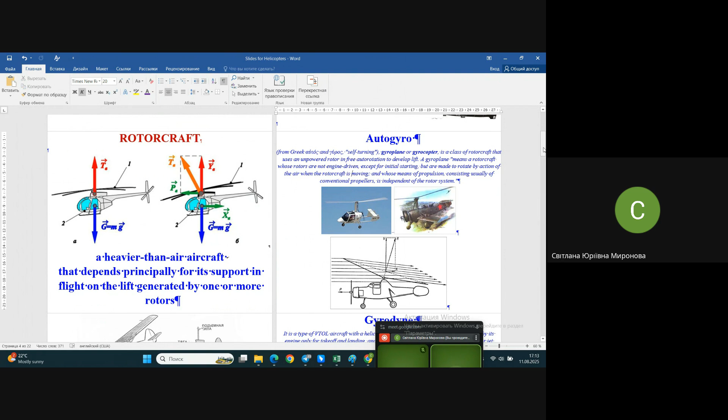Let's start from the beginning, and from time to time I will use different places to illustrate my words. I hope I'll be short, I hope I won't overtime this time. What I propose you see first...

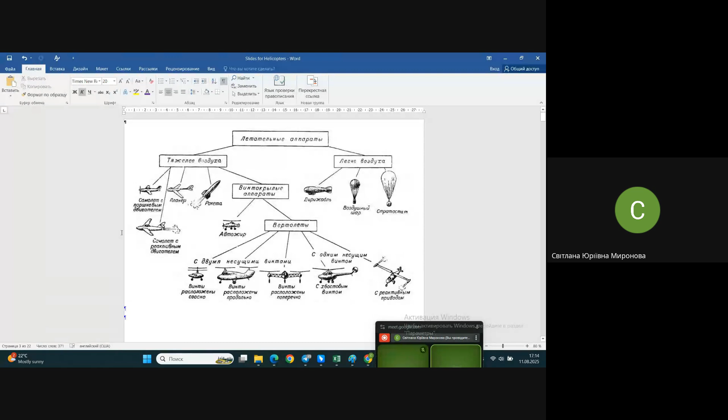The very first slide is about classification of flying machines, flying vehicles, which you have already seen in previous slides - the whole variety of different airplanes, heavier than air, lighter than air, with single wing, driven, non-driven, with rotors, and so on. Here is the great area, the whole area of rotorcraft. Taking a look, it's a variety of structures and schemes, even greater than the variety of heavier-than-air and lighter-than-air fixed wing aircraft, rockets, and so on.

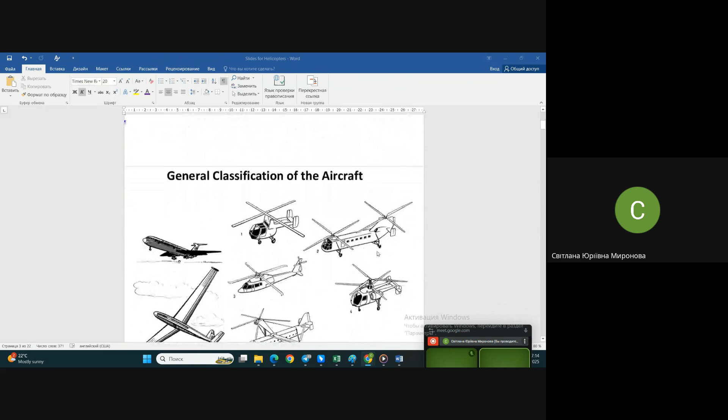In this picture you see aircraft of aerodynamic type only - previously there was rocket dynamic, aerostatical, and aerodynamical represented. Here you see aircraft only of the aerodynamical type. What do we see? Airplane, fixed wing aircraft with some propulsion system. Glider, again fixed wing aircraft, but without a propulsion system. That one that looks like a flying saucer, I already explained, is the so-called ekranoplane.

In English it's also called ekranoplane - a direct translation from our language, but they got used to this name taken from Slavonic languages literally. This ekranoplane, directly 'screen plane,' is a type of flying vehicle rather similar to an airplane with fuselage and wing, a so-called blended body, practically integrated one into another. Such a screen effect, flying over a screen literally, gives it an additional lifting effect due to its shape.

It creates something like a wind tunnel between the ground and the bottom surface of the aircraft. But it's able to lift its heaviest load only under the condition that it's flying over a conditionally flat surface - maybe a desert area, maybe a sea, or maybe a polar area with heavy snow and ice. In case of normal flight, it's quite the same flying machine, but not even with much higher aerodynamical quality, I mean.

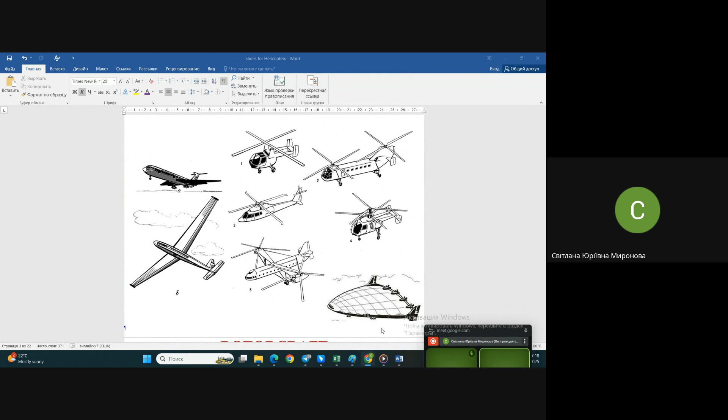Let's take a glance at the definition. What is understood as rotorcraft? I forgot to say, a heavier than air aircraft - that is important - a heavier than air aircraft that depends principally for its support in flight on the lift generated by one or more rotors, as I said. But depending on whether these rotors are driven by an engine or not, and depending on whether the horizontal flight of this aircraft depends only on the rotors or not, there are some principally different schemes of them.

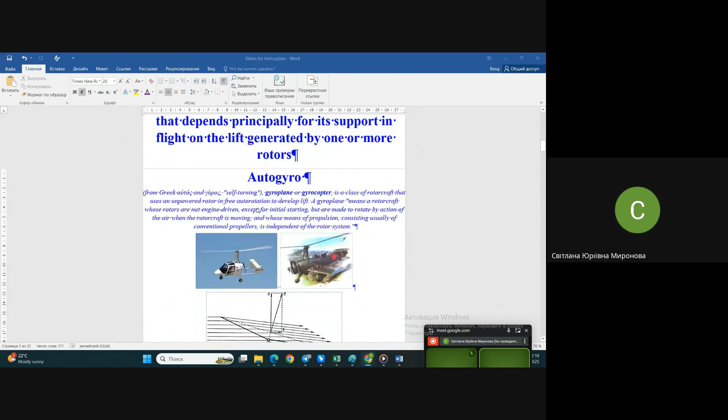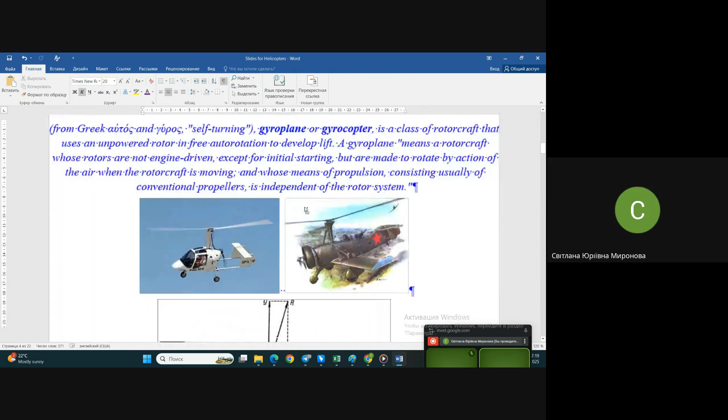I will start with the one that I have mentioned once already, and this one is called autogyro. Maybe it's necessary to show those names with another color. Let it be. Now you see in front of you pictures of an autogyro, so you understand that this is not the latest achievement or someone's trick - maybe you're already familiar with those. Forgive me, I forgot to switch off those slides.

On the left, a typical airplane or general aviation aircraft, but this typical airplane, for some reason, has a rather big rotor at the top. If you watch attentively, you may notice there is a rotating prop of pushing scheme behind the fuselage. That one is the autogyro of the period of the Second World War. As you may understand by the general appearance and by this sign, it's a Soviet flying vehicle.

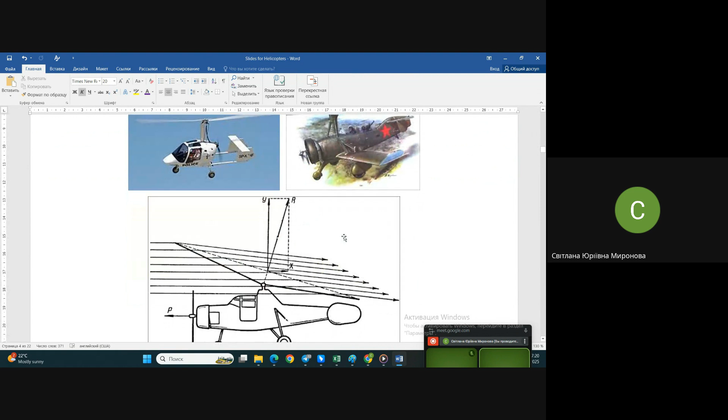And the same - you see a normal airplane, but this normal airplane, for some reason, has an additionally huge prop. What is the idea of this flying machine? Actually, it's something like an airplane, but with insufficient wings practically, maybe almost without wings. Look at this - seems like this creature has no wings at all.

What holds it in the air? It needs a normal runway - it can't take off vertically and land vertically. Well, it's already practically possible, maybe not quite vertically, but possible. Its rotor is not connected to the engine. The rotor works in auto-rotation mode, meaning it will start rotating after this flying vehicle, this dragonfly, runs over the runway for some meters at least, or maybe some tens of meters.

The relative wind, which appears due to the motion of this vehicle on the runway, will start to rotate the rotor, which is not fixed, and this auto-rotation will result in additional forces - the so-called resulting force. This resulting aerodynamical force, which appears on the airfoil, depending on how this rotor is deviated, may be decomposed into a horizontal component, which will counteract the thrust - I mean, this machine has more significant drag, due to the rotor.

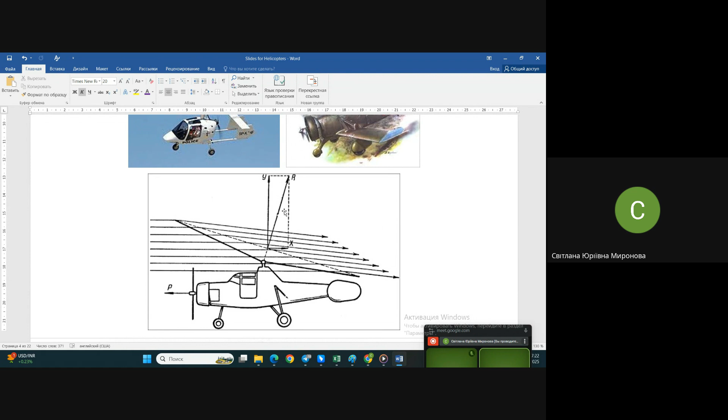On one hand, it has additional lift, or it may have lift only due to such an auto-rotated rotor. But look at this - that one, practically without wings, means its lift depends completely on the auto-rotated rotor, while that one has a wing. So in flight, it somehow relies on the lift of the wing, and the auto-rotated rotor gives additional lift together with additional drag. And what is better with respect to a normal helicopter? Well, on one hand, this creature is not able to hover, in contrast to a helicopter - it can't stop in the air and hang somewhere over the surface, which is called hovering.

And that one is not able to continue, as it stops its linear motion. In some seconds, some minutes, this autorotation stops, quite clear. And in contrast to helicopter, I said it needs horizontal flight on one hand, and on the other hand,

in contrast to airplane, it has something additional. No, it's not an air brake, but it's like a brake which reduces the falling down of this airplane in case you have a problem with the main engine, for instance. So in terms of takeoff, they are a bit more safe than a simple helicopter or simple airplane, maybe.

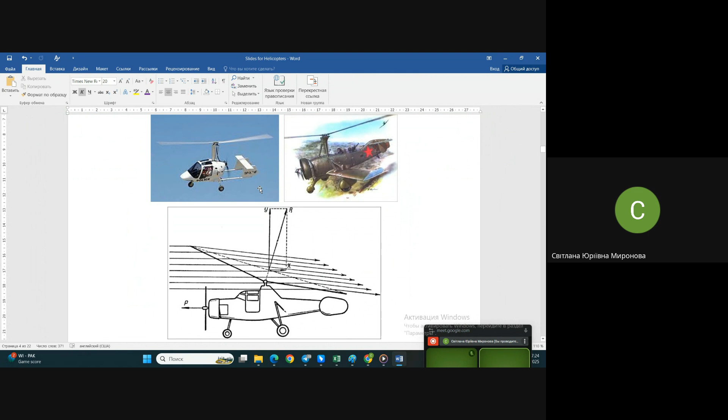But they are not able to take off vertically, and they are not able to hover in air. What you see, gyroplane definition: rotorcraft that use an unpowered rotor to develop lift. They vary extremely in design. You might check it on the internet, or maybe we will see it together if time is enough to see some photos.

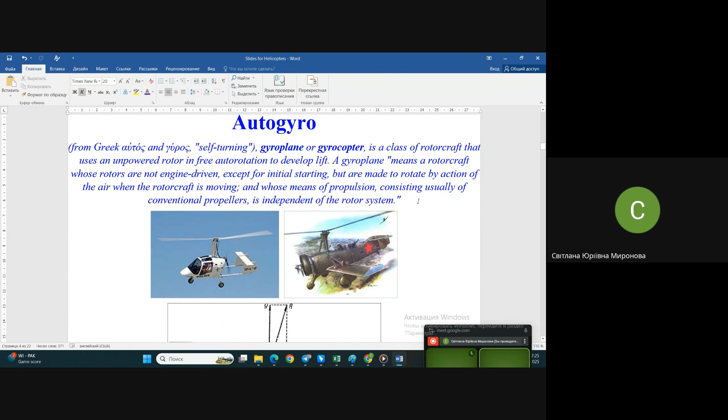I placed here a couple of them to demonstrate the variance. These autogyros were created historically. They appeared earlier than helicopters, earlier than the first models of helicopters at all, approximately 10 to 12 years into the 20th century, when the first models of autogyro were already designed. Whether they were flying or not is difficult to say, because people write there are no evidences of their flights, but at least models were created and people already thought about this way of flying.

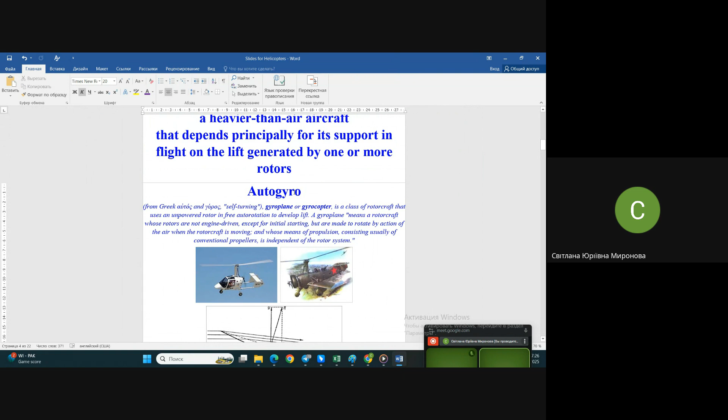The most popular is autogyro, but gyroplane, gyrocopter, they are also usable. You do remember what is my opinion about terminology in English-talking countries. And now you see that autogyro - I hope it's obvious for you - is something like a hybrid between a conventional airplane and conventional helicopter. So it combines both advantages and disadvantages of both types.

These typically look like dragonflies, not really flying bicycles, but with skin over the skeleton. These vehicles are of piston engine type, or maybe electrical piston type, electrical type of engine. I have seen photos, if I'm not mistaken, even on the manual - not ready to show you right now, maybe in a previous set of slides - photos where it was really something like a bicycle, human-powered flight for such devices.

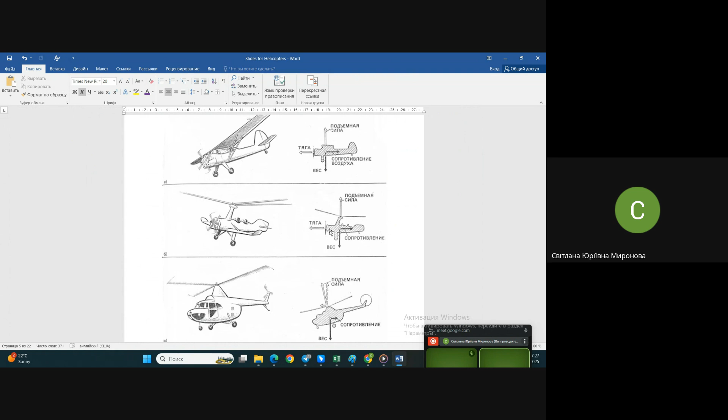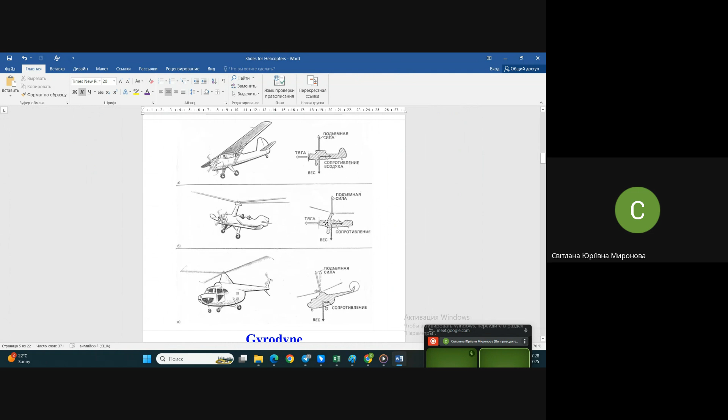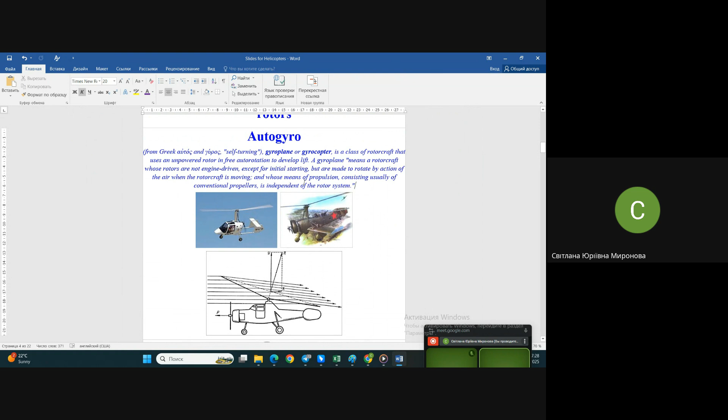Autogyro, gyroplane, gyrocopter: slow in speed, usually light, not heavier, but there are some of them, as you might see even in photos, that are rather sufficient in weight. Well, next type of flying machine - that one, once again, has a rotor, but this rotor is not connected to the engine, and it works in the autorotation mode.

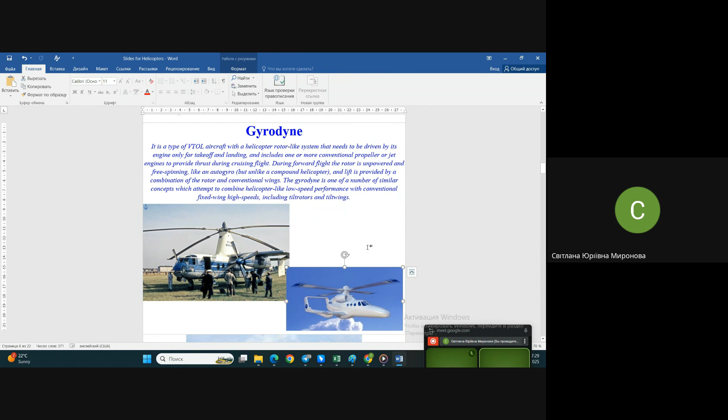We have already seen some of their airplanes in one of our classes, and I hope in the next class we'll also see and talk about their models and about the designer - once again, Burt Rutan, who is responsible for this. Time to time, mostly he is responsible. Look now, what do you see in the picture?

At first glance, first look, you see an airplane. But this airplane, for some reason, has additional devices. At the top, you see an American Gyrodyne. And at the bottom, you see a Soviet Gyrodyne. Gyrodynes, the idea of Gyrodynes, were extremely popular in the years 50, 60, 70 of the previous century.

Actually, the idea was to use them mostly for cargo or passengers, and they practically look like normal airplanes, but they also have a main rotor, at least one main rotor. They have normal engines responsible for cruise flight, but they also have a main rotor. You may compare it with a convertiplane, for instance - you may say it's a convertiplane.

No, it's not, because it has a main rotor that works permanently, in contrary to the convertiplane, which changes the directions of its props in order to serve either as main rotors or as normal props in flight. That one permanently uses two different systems of propulsion, let's say, and of creating lift. What is no less important...

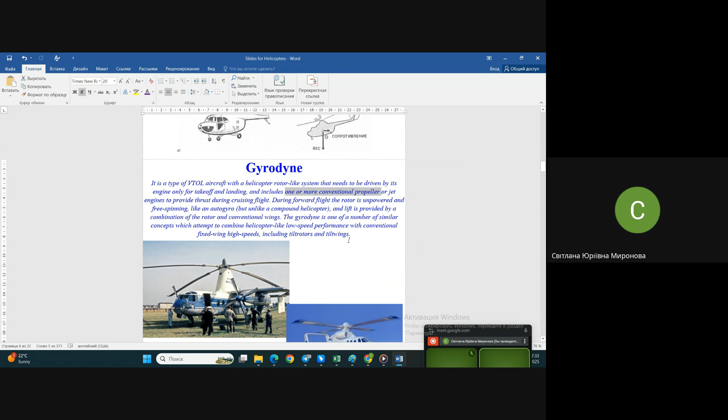What are obviously normal engine props, prop engines with props. And here is also visible - look at this, in the cabin of the gyrodyne we see normal props and the exhaust channels and so on. So it looks like a hybrid of helicopter and airplane, but autogyros are usually little, light dragonflies. These ones are rather heavy. They are useful for their ability to take off and land and hover in the air.

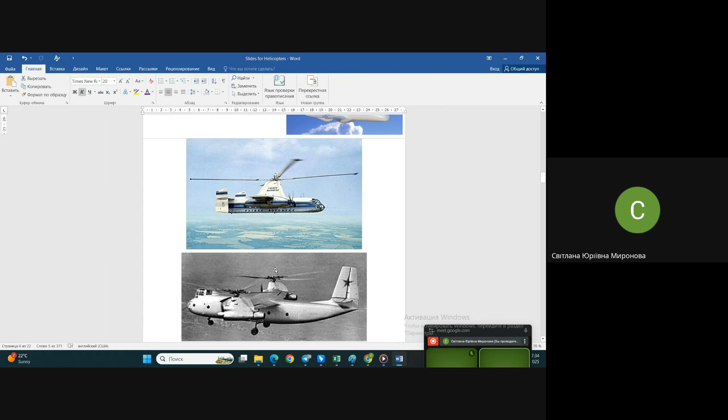Whether they are reliable and whether it's feasible to transport people like this, I have my own opinion about, and I propose you to form your own opinion about the feasibility of such a flying machine.

Well, helicopters. Now helicopters. A helicopter is a clean, normal rotorcraft in terms that the helicopter's lift completely depends on the motion of the helicopter rotor. And I would say that is the main disadvantage of any helicopter.

As soon as the engine stops, it may block - in some cases auto rotation of the main rotor is available, in other cases it just blocks this rotation. And instead of a flying machine, it becomes a falling stone, falling down. You understand? So, in my opinion, helicopters are mostly the most dangerous flying machines, in my opinion. Extremely useful, various in their functions, as funny as nothing else, as for me, in their appearance. Lovely, lovely, lovely. But in my opinion, it's a very dangerous machine, and wherever it's possible, I exclude the use of this machine.

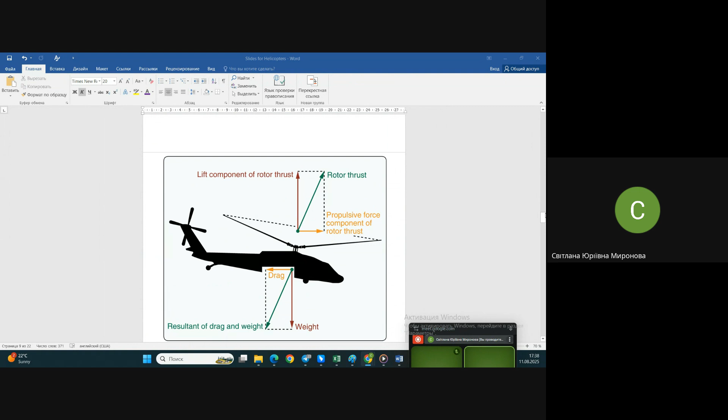Now we already see it. Let's come back to the previous picture. That one. This force is directed normal to the main rotor, and it may move the helicopter up, or in case it's less than the weight of the helicopter, it may descend and move down. But how to move the helicopter to the front, to the left, to the right? Usually this problem is solved in such a way.

The helicopter declines its nose, pitching down a bit, and you see here the plane of the main rotor also pitches down, and the resulting force, the force of the rotor, is deviated with some angle. Due to this, there appears on one hand lift, a decomposition of this force as we have seen many times already: the lift and the thrust that pushes the helicopter forward.

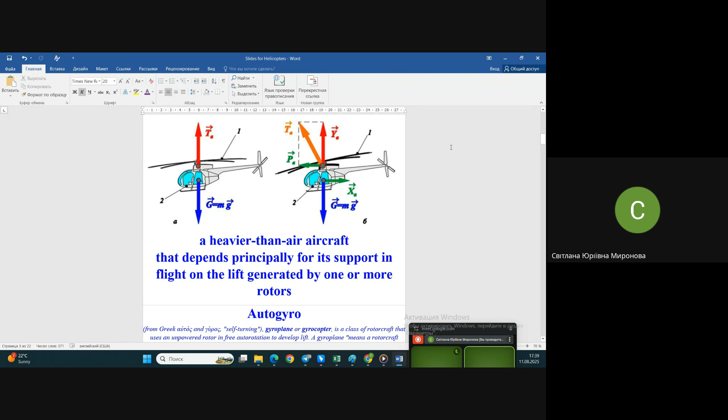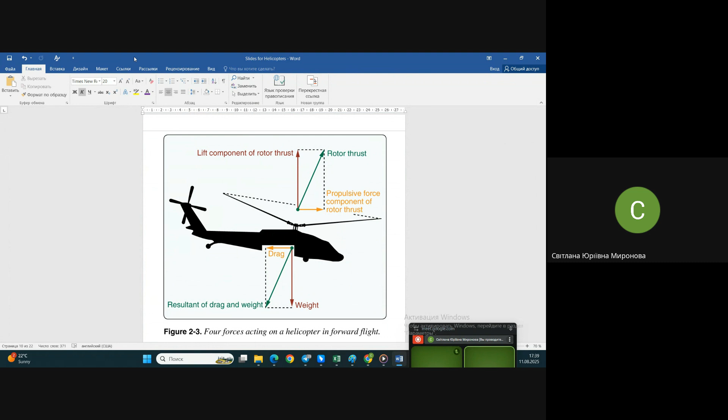Seems like everything is very simple, but it's a big 'but.' Take a look at this. No, here is the same thing but with more explanation. I took this from the book I've shown you, from the Federal Aviation Administration, this picture. I show it on purpose with the figure number. If you need it, you will find it and read about it.

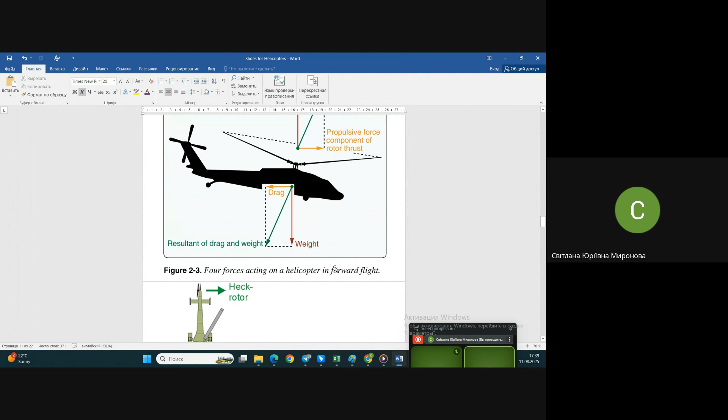Here I placed a couple of beautiful pictures to show you why a helicopter needs some additional rotors.

Let's recollect Newton's third law: action is equal to reaction. What does the helicopter do? It rotates the rotor. And due to these blade rotations in one direction, there appears a reacting force which rotates the helicopter. The whole helicopter will be rotated in the other direction.

I think you have already seen such a video maybe. I may try to find it right now, but I think it's not necessary. When there's some problem with either the tail rotor of the helicopter or some other controlling device of the helicopter, we see how the helicopter rotates in the air instead of just hovering, it starts to rotate severely, and this loss of control can of course result in a crash.

You understand? Well, what should we do in this case? How to counteract a force like this? Once again, the man who was the first ever to solve this problem did so in his first flying helicopter.

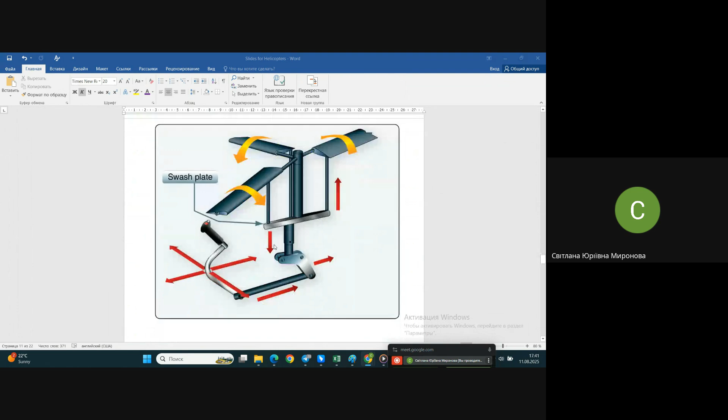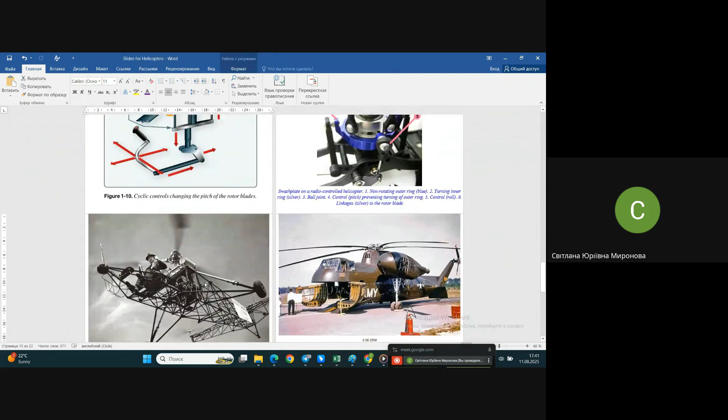That was... it's not in the order of my explanations that I had thought to make. Igor Ivanovich, help us. Here is. Here is.

You see, test flight, the maiden flight of the helicopter in 1939. Very interesting photo. Especially interesting that the test pilot, who should be, as you understand, in some protective device, something like a helmet, no, he was always in his lucky hat, and he protected his enormous brains only with that.

He solved this problem by adding rotors at the end, and here is a rather weird structure of the helicopter, of course, but these tail rotors are also a rather weird decision for modern helicopters. You see there are some tail rotors on the tail beam, something like a stabilizer behind.

Okay, let's come back to the previous explanation. Where's the slide? So the most typical decision, after Sikorsky made his first models of helicopter, was one more rotor incorporated in the tail beam, but this rotor was in a perpendicular direction with respect to the plane of the main rotor. Its rotation was perpendicular to the direction of the main rotor.

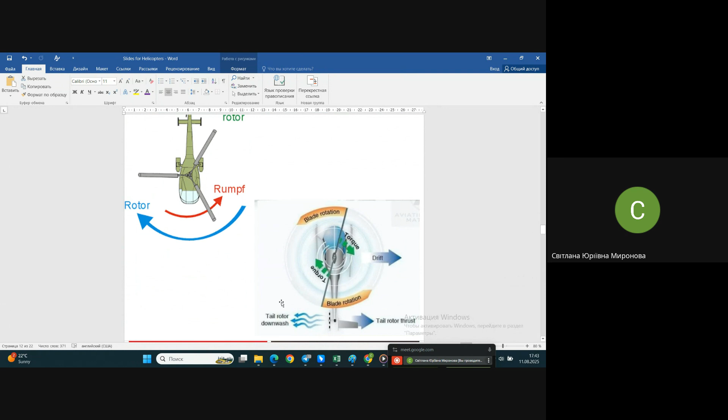And in this case, this little tail rotor, rotating somewhere in another place, also creates lift, and this lift with respect to the center of gravity creates a counter moment. If the main rotor creates a moment, a torque that tries to rotate the helicopter in one direction, the tail rotor should create a force which creates a counter moment, and this stabilizes the flight.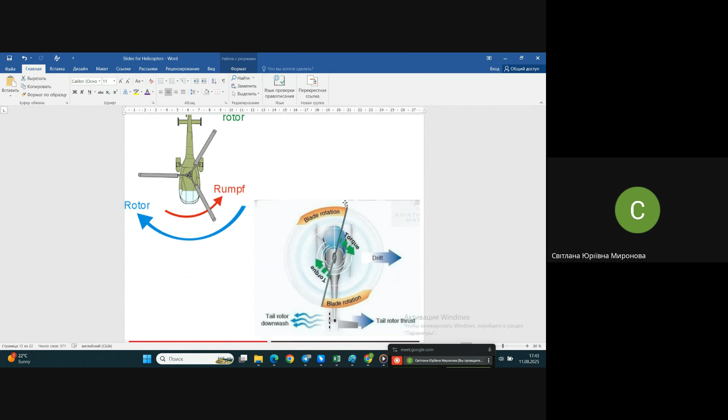So another rotor is necessary, like the stabilizer on an airplane was necessary, actually. Seems like this. Now, the same picture explaining the same thing, very simple, but do forgive me, it's in German.

But not all the pictures show the whole classification, and not all of them give the same names. The main, most popular name is single main rotor helicopter, the conventional one. You see the main rotor and the tail rotor on the beam. The same may be called... there are no names.

I've seen other names slightly deviated for this type of helicopter, including the conventional one, just a conventional helicopter. It comes with a main rotor and tail rotor. How to solve the problem of counter rotation? It's compulsory to place an additional rotor, a little one on the tail, that counteracts the main one.

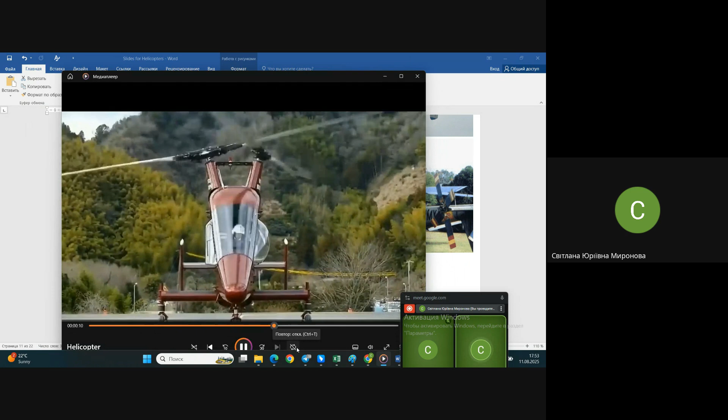Just to entertain you, as I said, in order you may imagine what it looks like. I hope it's not difficult to imagine even without this video.

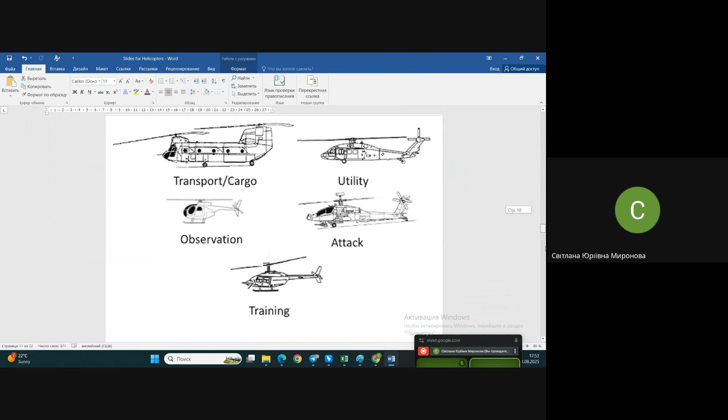Now if I come back to that photo of Sikorsky, when I read about his attempt to start making helicopter flight, what I read first, and what I knew actually, even before I was interested in Sikorsky's person and work, I heard such a name - direct translation from our language would be something like automaton of deviation or automaton of declination. What is it? In our language it sounds no less weird. It's used in each helicopter to make the helicopter fly. In English it's called swash plate. We will see it in some pictures next.

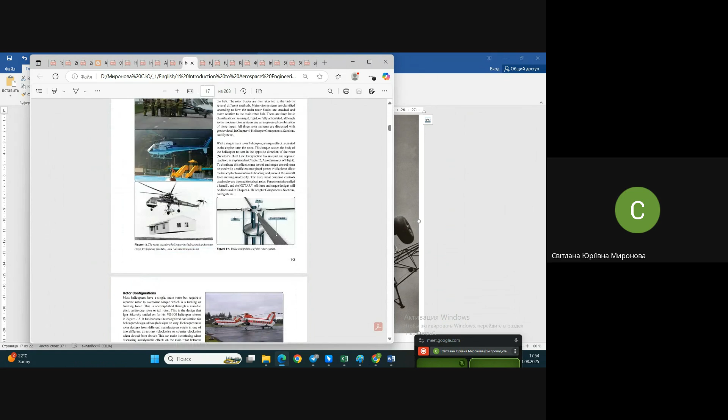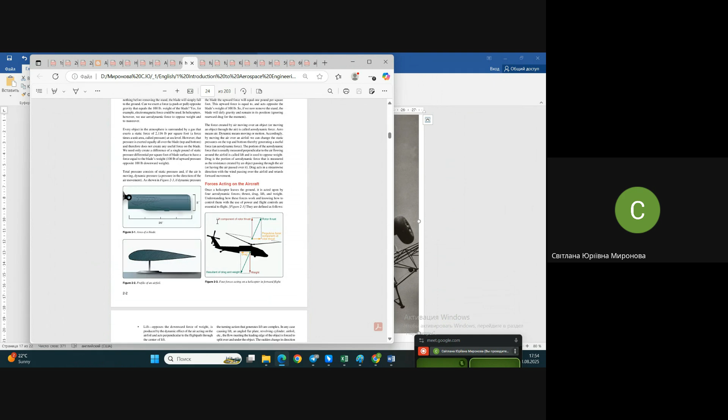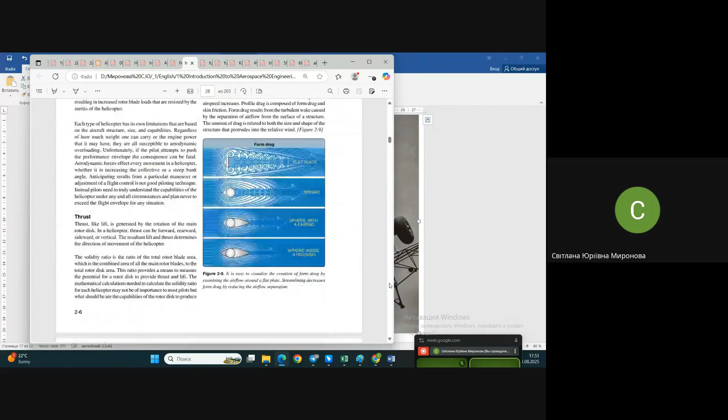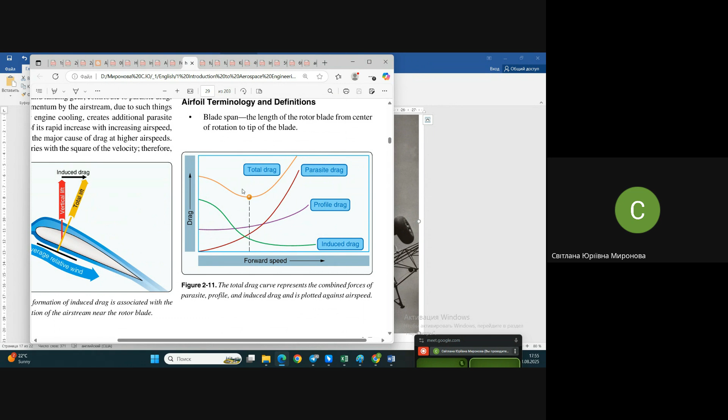As I already said, in a book that I propose you use in case you are interested - Introduction to Aerospace Engineering - maybe I meant to show you some pictures here, but I don't clearly remember, sorry. If you scroll through it to see the aerodynamics of helicopter, you will see very similar pictures that we already know when we studied aerodynamic flight. You have seen practically the same pictures, the same information about downwashing, about drag, what are the components of drag and how they appear, about resulting forces, and so on. But the only difference may be from the flight of an airplane, if you imagine it.

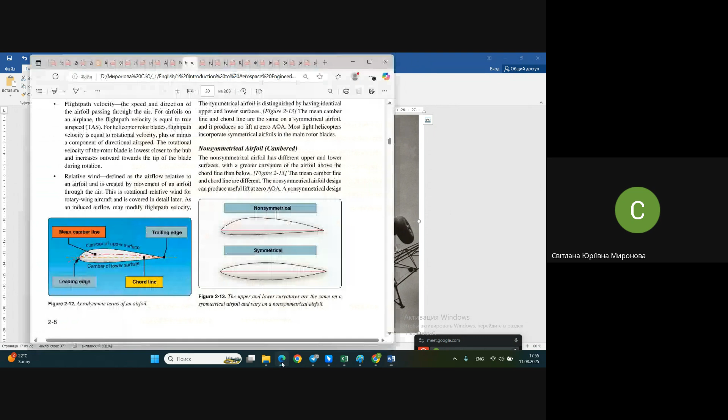Once again, let's come back to the airfoil. There was downwashing somewhere, yeah. Look, a force appears - this resulting force, this force useful for us. It appears when downwashing relative to the wing is directed toward the nose, the leading edge of the airfoil, on one hand. On the other hand, especially when this flying machine is already trying to make horizontal flight, and it rotates the main rotor - how does it fly, once again due to rotation of the main rotor - no, not rotation, but declination of the main rotor to the horizon. When it moves tail up and pitches down the nose, the plane of rotation changes, and the resulting force should be decomposed into lift and pushing force.

But what happens - if you imagine what happens in this case, you will understand that each blade which rotates will have its permanently changing angle of attack. It will have a permanent change in lift, less or more, because due to the position of each blade, the blade is not stable in flight.

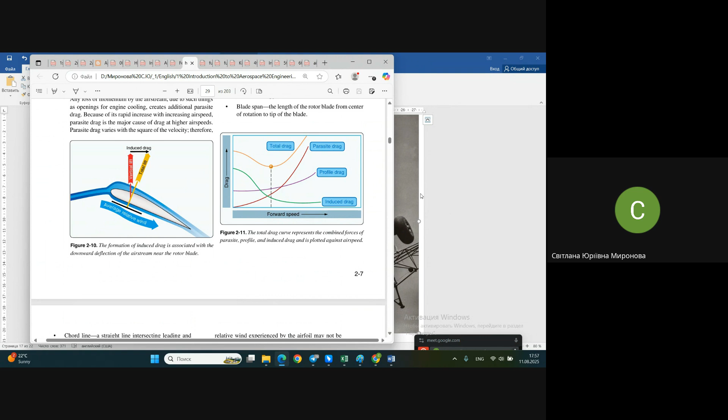Sikorsky, in his first attempts to fly a helicopter, in his model of helicopter that we see right now, encountered such a problem. He moved up successfully and down successfully, and as I read, he was successfully moved to the left and to the right. But this machine was not able to fly forward. Until he understood what the problem was and solved it in his own engineering way, about 1.5 years passed - 18 months - he tried to teach his machine to fly forward. It would take off, hover, deviate somehow, but not fly forward. To solve this problem, he invented his own swash plate, as it's called in English - a special vehicle. We will see right now what this vehicle is.

But before him, there was a similar thing, a bit different in design. It's said that Sikorsky's design is more perfect, better. But even by now, some helicopters use Sikorsky's design, and some helicopters use Yuriev's design. Sikorsky and Yuriev are the family names of the inventors of this mechanism, necessary to help the helicopter fly, to control it in flight, to make it fly forward.

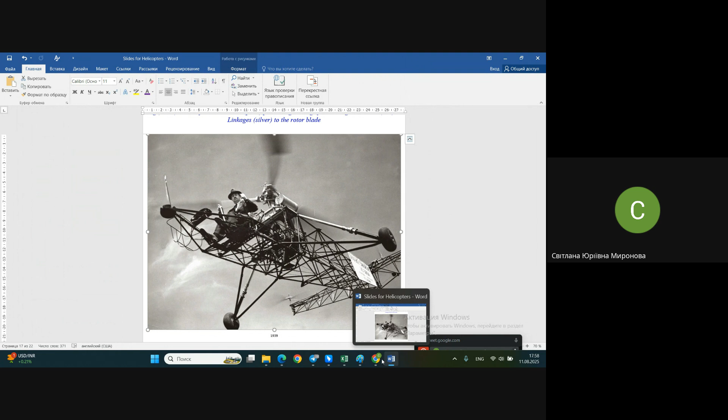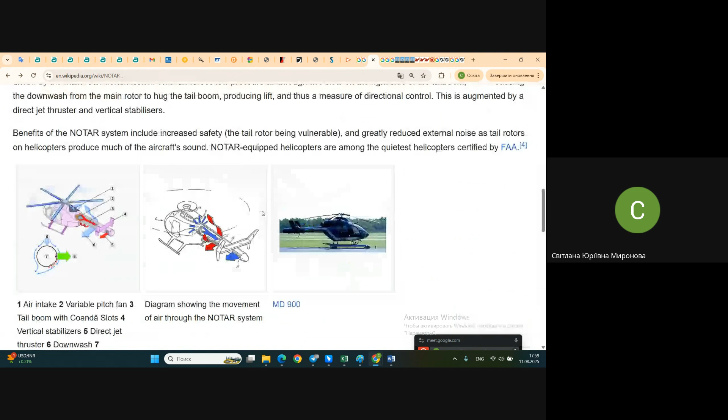Let me show you. I left some pages here on purpose. Here is NOTAR - what here is the scheme of the NOTAR helicopter. Forgive me, it's not about the swash plate, it's in order that we may imagine how the NOTAR system works. Maybe it was necessary to take this photo too, two slides. And where is it? Where is it? We will find it now.

No, not that one, the English one. It's not working right now. Let me show you. I will show you in the English version of this free encyclopedia. There's also an animation there. First, let's take a look at this video. Nothing's really visible yet, I've been watching, trying to figure out the trick.

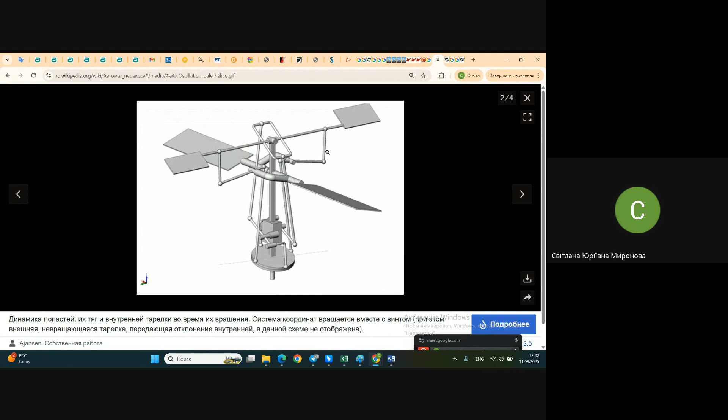But really, in flight, it's something like what we saw in the previous animation - not quite like this. But finally it will look like this: quite stable rotation with a constant angle of attack. But really, each blade permanently rotates via these additional rods which connect to the swash plate.

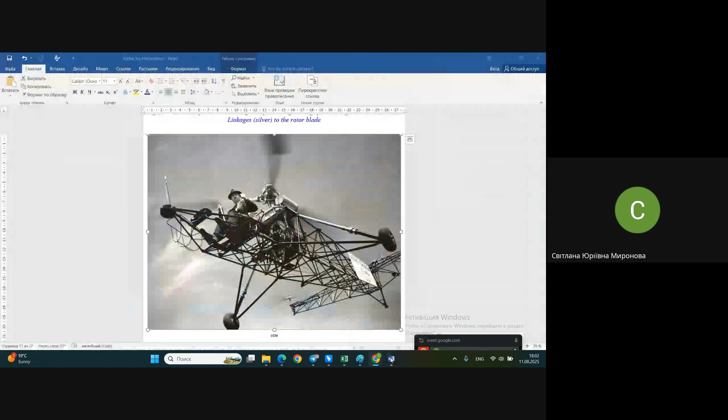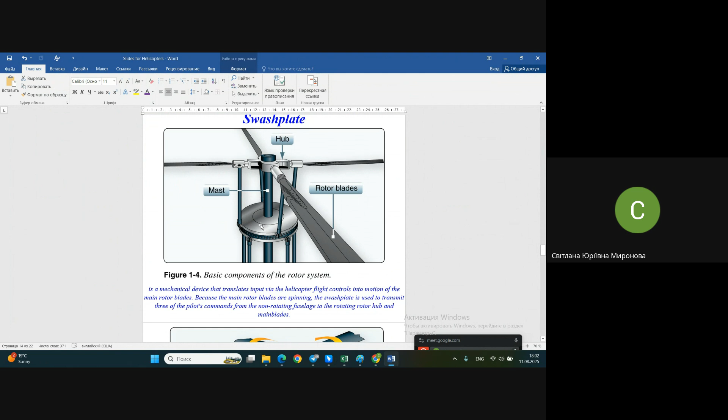Now I'll show you the slides again. Here is this swash plate, and here's an explanation of how the main rotor works. Maybe this explanation isn't much more understandable - the animation was clearer, as for me. In the slides you'll see some schemes explaining how this swash plate is usually arranged. It's a rather complex mechanism, and there are two models of them.

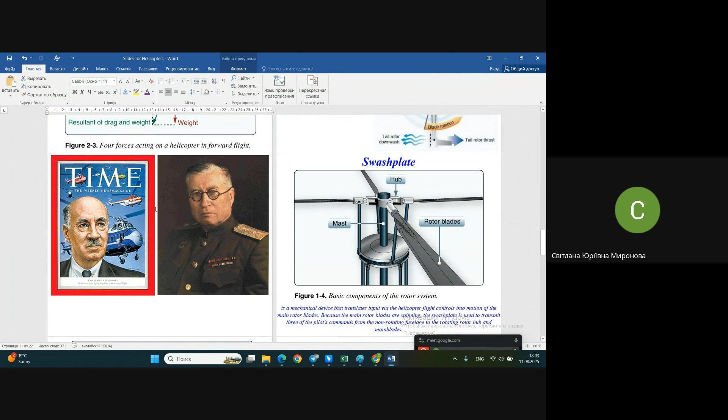One photo you see on the right - that's Russian Soviet engineer Boris Yuryev, who solved this problem. I'll show you his first attempts too. It's known he solved this problem before the First World War, but he didn't succeed - he had no flights or anything like that. He didn't invent a flying helicopter, but at least he solved the engineering problem.

Whether Sikorsky knew about this work or not is a question, since they lived in different cities in the same country at approximately the same time. You remember, I hope, that before the First World War Sikorsky traveled from Kiev to St. Petersburg, the capital of the Russian Empire, where he worked on airplanes as a designer and inventor of outstanding, amazing airplanes for that time. Meanwhile, Boris Yuryev was working in Moscow, a student of Nikolai Yegorovich Zhukovsky, and was even his son-in-law - he married his daughter later.

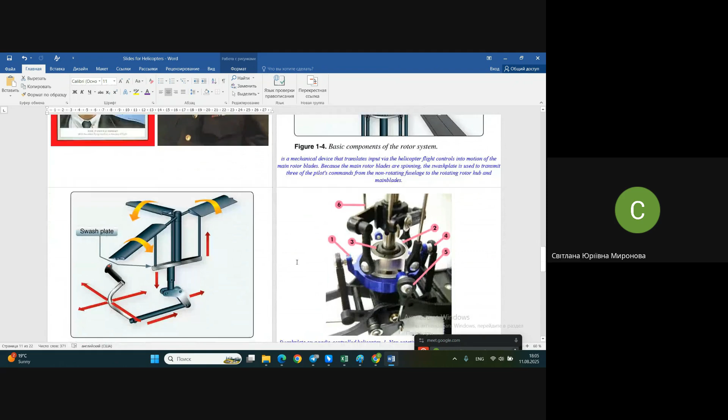So they worked at approximately the same time, in the same country, but it was a different period of civilization - people separated by hundreds of kilometers had no way to communicate besides letters or short telegrams. Whether they knew of each other's work is the question. It seems they went separate ways but solved this problem similarly, with some differences in their devices. This swash plate, practically unchanged, is now used in all helicopter structures to control flight.

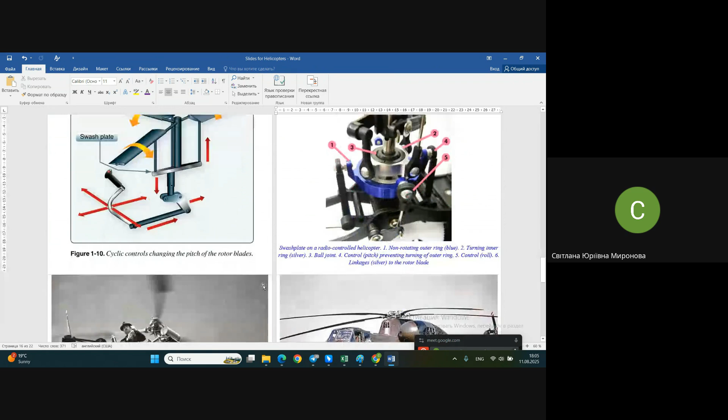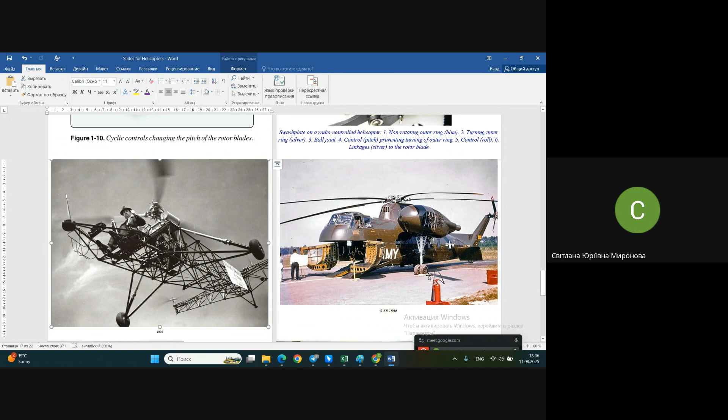Take a look at this creature - very funny photo, as for me. It's the very first Sikorsky helicopter, maybe with a number, not sure. It's called VS-300, but what's the number in his own counting? Not certain - need to check. Something like S-39, maybe. And that one, look, is also a Sikorsky design.

It's a creature from animation movies for children, very simple, very beautiful, funny and cute. But actually it's a bit unpleasant, let's say, because it was used as a weapon in the American army.

No, it's a cargo helicopter, quite clear, you understand. It's a very famous helicopter which was taken as a weapon by the army with designation CH-37. It was used for transportation of troops, even automobile vehicles, and so on. That is its general appearance - a heavy loaded helicopter, but that one is the best ever.

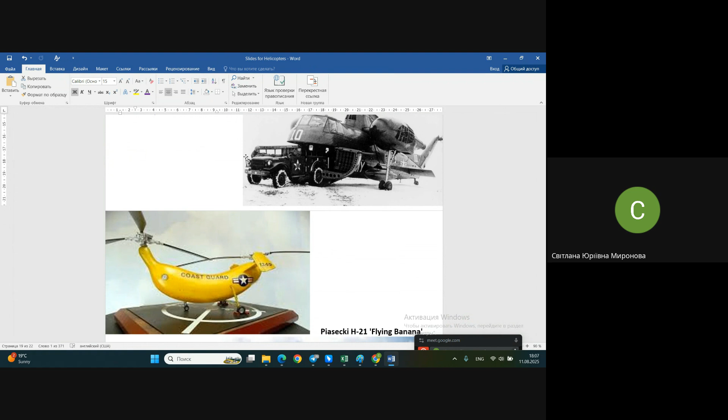Like a crocodile. And approximately at the same time - don't think I'm teasing you, well, I am teasing you a bit, but don't think it's a joke - it's also a helicopter, but that one is a souvenir based on the motives of a real helicopter. The real one doesn't differ much.

You see, it's the so-called flying banana, also a helicopter from the 1950s era of the previous century, with a very difficult name to pronounce - maybe difficult for you, maybe not. Piasecki, Piasecki, because this designer had origins somewhere in Poland. You see, all Americans - one came from Russia, another from Poland, and so on. As they say, America is a country of immigrants.

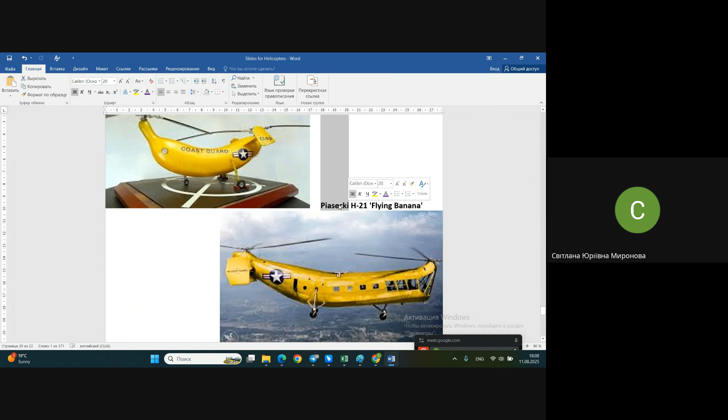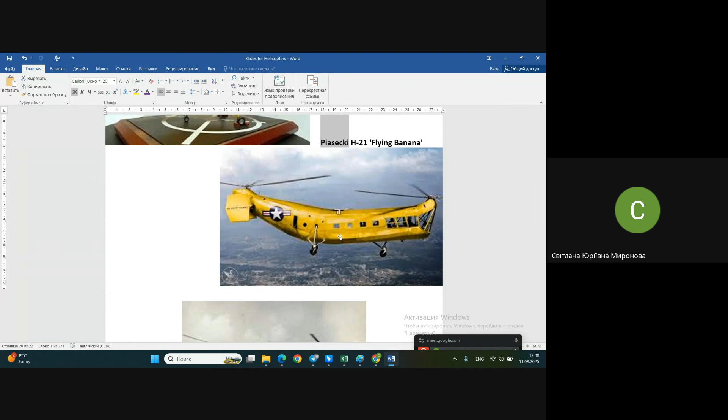This flying banana - originally, in the beginning, it looked like this. It was considered the very first scheme of tandem helicopters, a well-known aircraft, and it was used in the American army, as well as a civil helicopter - cargo helicopter, passenger helicopter, and rescue helicopter.

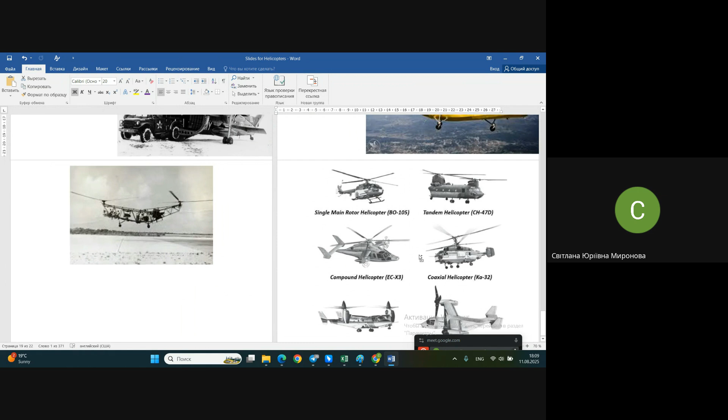Well, we still have some minutes. Slides are practically over. That one is, for me, for the next period of our conversations.

And again, you see this single main rotor helicopter example, the tandem one, the coaxial one, the tilt rotor, and different types - tilt rotor, tilt wing. They are really not helicopters. We can't call them gyrodynes.

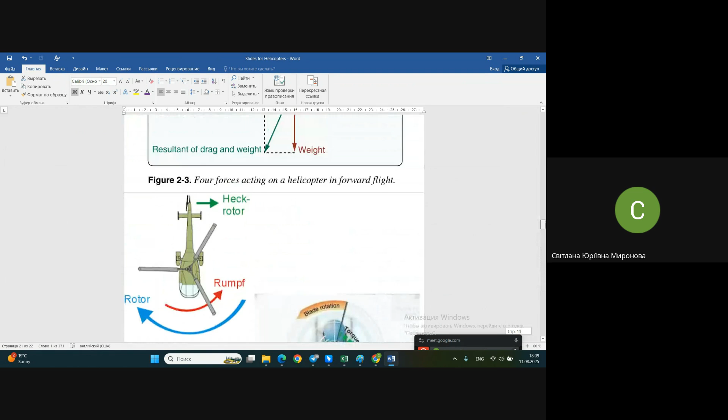What if we compare to gyrodynes? You remember the gyrodyne permanently has - it was visible - let's come back to gyrodynes. A gyrodyne permanently has these cruise engines, as they are called, with their props. They never use turbojet engines, because a turbojet would be, on one hand, too speedy, and on the other hand, too heavy. If you fly slowly, they are heavy and consume too much fuel - it's not economical at that speed, in that range of flight, where the gyrodyne is used.

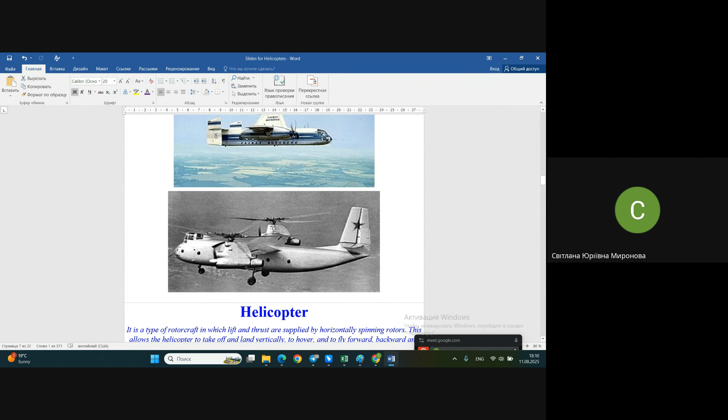And their main rotors are rather big, notable. Of course it's not the same as those tilt rotors, as they are called. They are not helicopters, once again - they are hybrid aircraft, usually categorized as convertiplanes.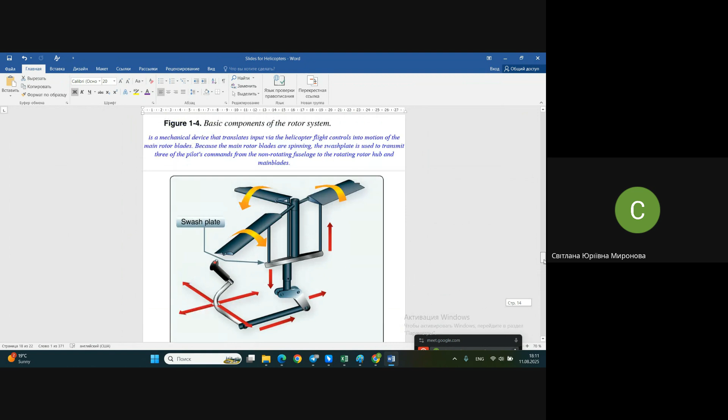Well, what did I forget to tell you about helicopters - how they fly? As for me, it's simple to imagine. I promised to show you some historical photos. We'll do it right now.

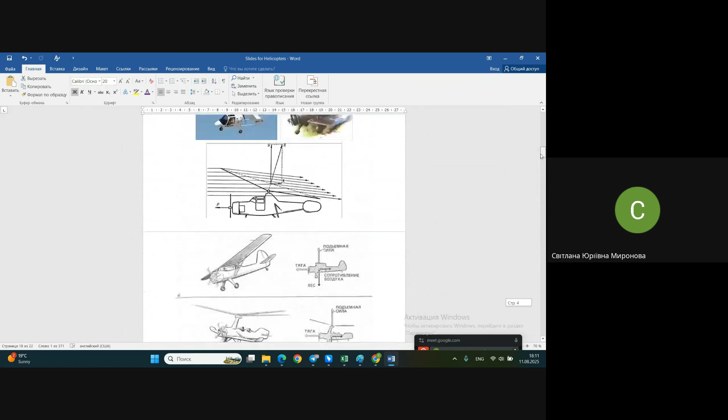Scheme of helicopter flight forces. In climbing and descending, it's directed - typically the lift of the main rotor is directed upward, and it either exceeds the weight, in which case you climb up, or it's less than the weight, in which case you descend.

And in order to make forward flight, it's necessary to move the tail up, to decline the main rotor plane, and in this case the resulting force should also deviate. We may decompose it, using part to produce lift and part to produce thrust - some imitation of thrust, let's say.

But in this case the problem was, and you have seen this problem, that each blade will change - in case you have no pitch control by means of a swash plate, each blade will have a different angle of attack permanently while making one rotation. It will permanently change its angle of attack.

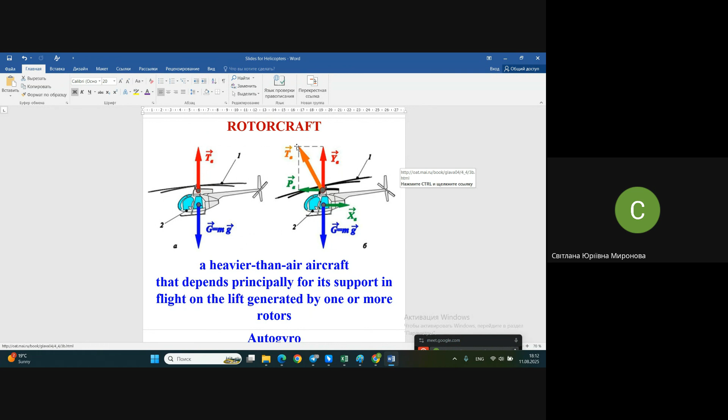In order to stabilize the angle of attack, a device was invented, once again independently, by two different engineers. On one hand, at least it's considered the first was Boris Yuryev. I've seen in different sources that there was one more engineer, an Italian engineer, whose name I don't remember now, but if you're interested, in the historical book you might find the place about his work. But again, there's no evidence, no models, and so on.

Wait a second, let's find that book. It was just in Google Library, and I placed it somewhere. Here it is. The book name is Principles of Helicopter Aerodynamics.

Still didn't find the way how to find it for free. Do forgive. And what do you see right now?

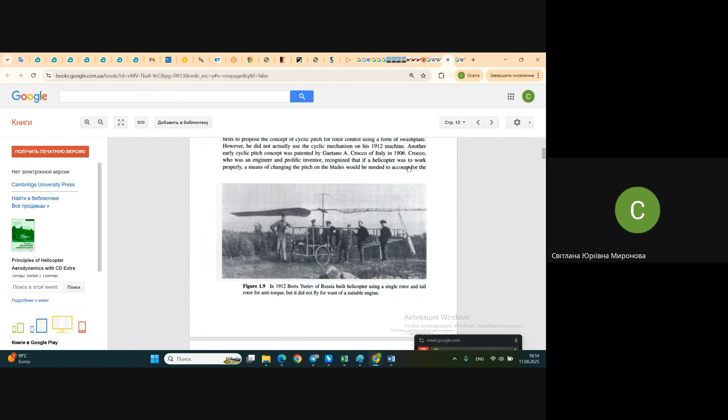It's a historical photo, with the story about helicopters and the invention in this field, interesting to read. This historical photo was made in 1912, when Sikorsky was involved in his airplane design, the one with the balcony in front of the cockpit, you remember? It was for passengers, so they could go out on the balcony and enjoy the view during the flight.

Approximately at the same time, Boris Yuriev and a group of students of Zhukovsky in Moscow were trying to create a flying machine very similar to a helicopter. There's nothing visible here like some tracks. Oh, here is Gaetano Crocco in Italy in 1906, who it's said maybe was the first. There are no visible tracks of this swash plate as written in literature sources, but nevertheless it's considered proven already that Yuriev was the author.

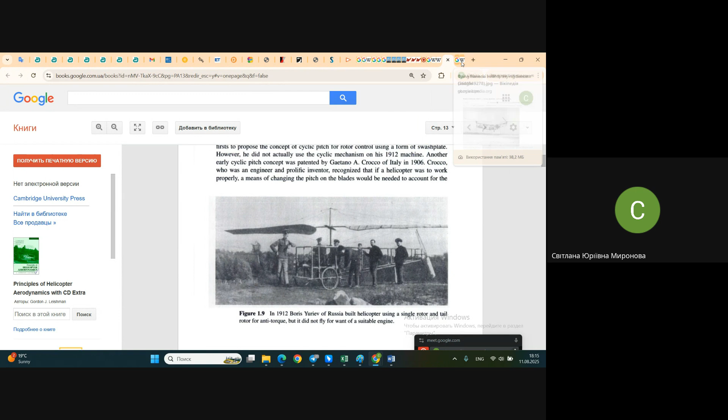Great feelings it should be, imagine how they fly. We'll close that. That is also about flying bananas, but by the variety of photos you already understand it's a very serious helicopter.

However funny it looks in some photos, this serious helicopter really was used as a rescue helicopter, as a cargo helicopter, and as a passenger helicopter. Here is an interesting photo about this helicopter. Why doesn't it move now? They were movable, no idea why. Now they move.

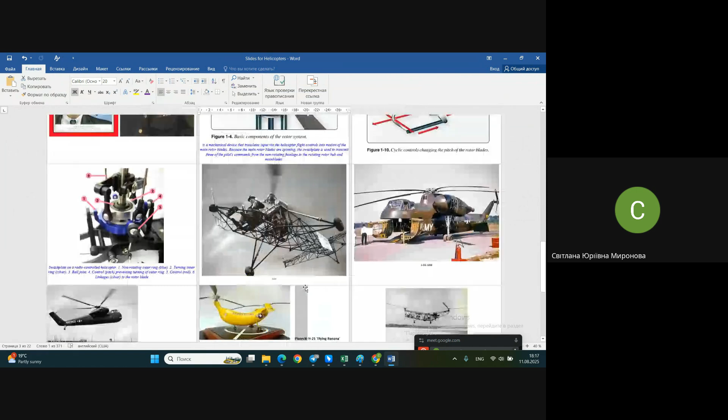It was said that the very first model was taken to the American Army even in 1948, much earlier than the Sikorsky helicopter of similar capacity. That helicopter, the Mojave, was much more powerful, it seems, and had another purpose. You see it was maybe used for passengers, for troops, or for rescuing people under the helicopter, with this hanging device. But Mojave was a helicopter for transporting not only people but other vehicles as well, like this.

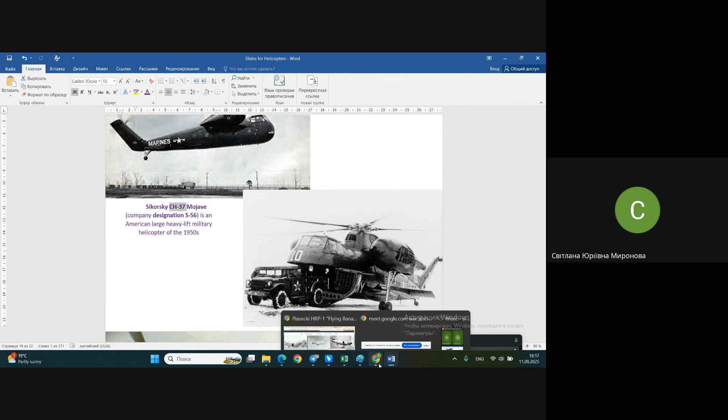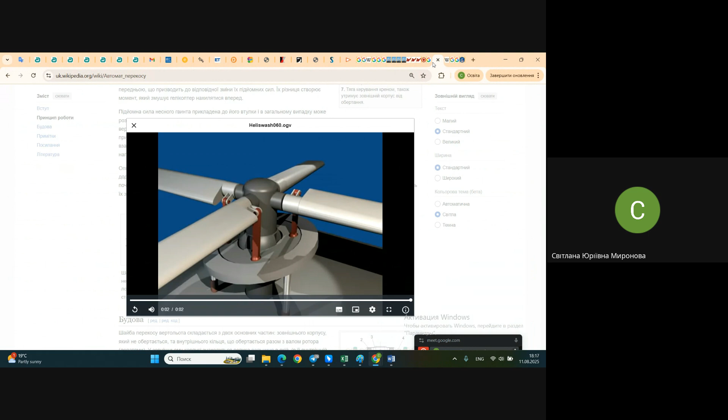From the bottom it has a rather funny appearance. If you're interested, you can search this name to look in different books and different sources. Let me show you what I tried to show, if I can find it. Yuriev, Piasecki, it's great, but how to find it? Let's try to find it quickly if possible.

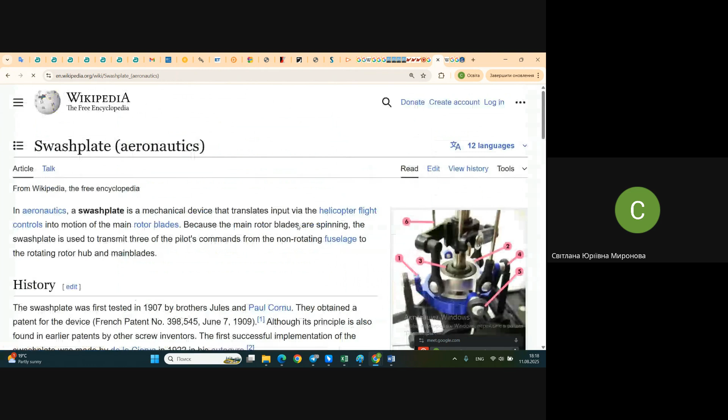This vehicle is just something—what our ideas, what our designer may imagine, it's something real. And that is the model. This model in the museum is shown together with practically the same photos we've seen in the historical English book about Yuriev's helicopter, and it's already 5 years later.

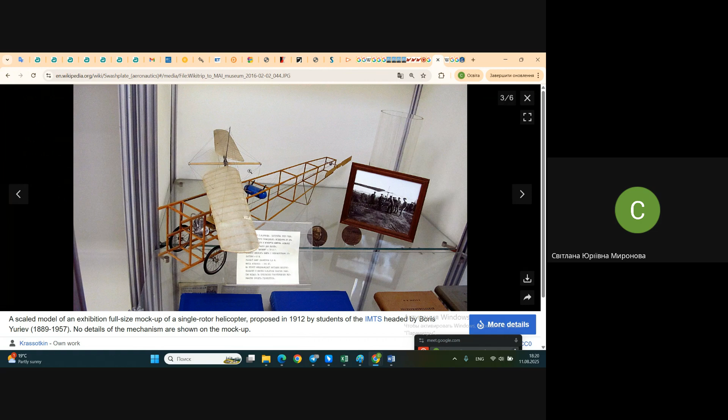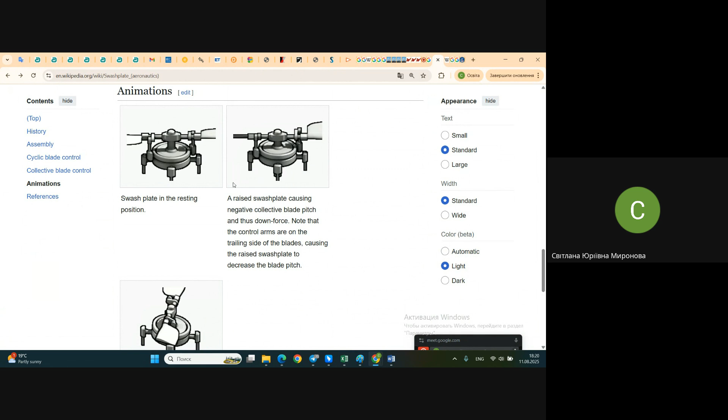I hope it's enough. As I said, in the English version there is animation, but it's difficult to understand something from it alone. By combining the animations I've shown you, where blades look completely stable, and in contrast where it's inverted motion and blades dance permanently, it's more understandable what the problem in flight was, and what was necessary to solve to make helicopters fly. That is why maybe one of the reasons Sikorsky is called father of helicopters is because he taught helicopters to fly forward. We will continue later with other vehicles flying vertically or taking off vertically, and with some other ways to control flight not due to flight controls. Right now, let's stop recording.